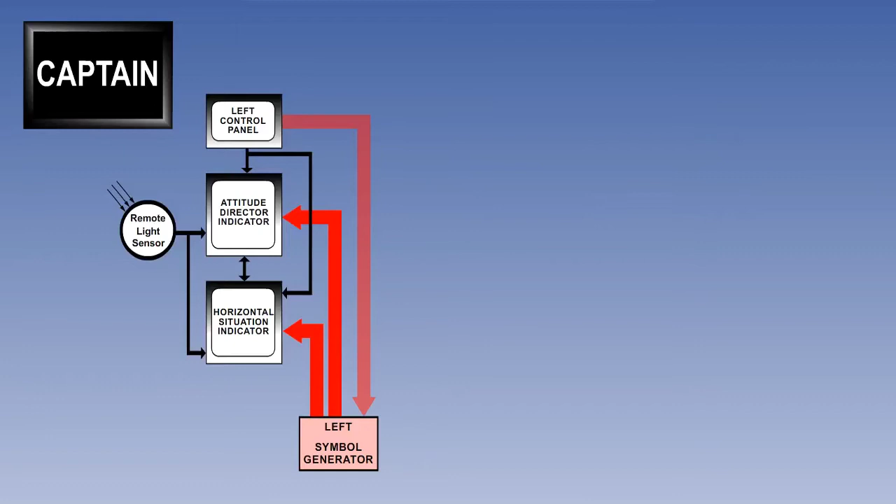A complete EFIS installation is made up of two individual systems, one for the captain and one for the first officer. In the diagrammatic layout here, we can see that each system contains an EADI, which is the preferred Boeing term.

Airbus call it a Primary Flight Display, or PFD. There is also an EHSI, as Boeing call it. Airbus call it a Navigation Display, or ND. However, you should be prepared to see EADI and PFD used interchangeably, and the same with EHSI and ND. Also, other manufacturers may use either term.

Additionally, there is a control panel, a symbol generator, and a remote light sensor unit, which responds to ambient light conditions on the flight deck to automatically adjust the brightness of the screen display. In addition, a third backup symbol generator is incorporated, in case a system symbol generator should fail.

In this lesson, we are going to look only at the Electronic Attitude Director, or EADI part of the EFIS system.

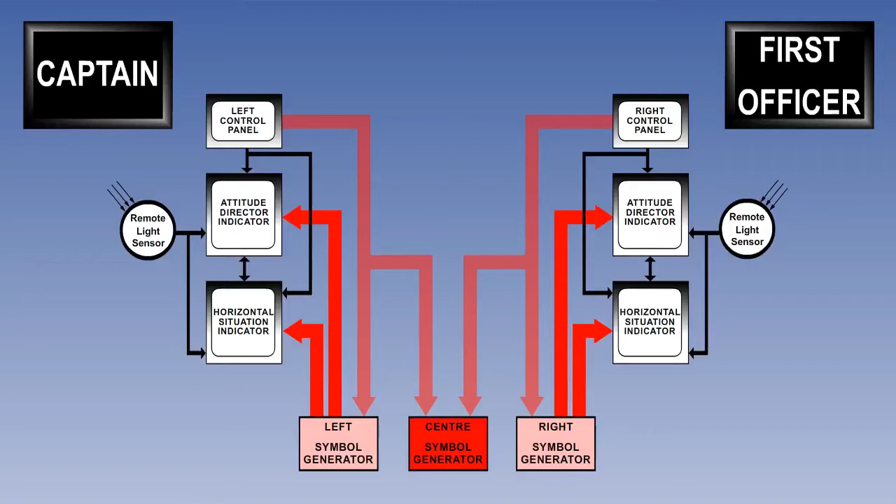The EADI is an electronic representation of an Attitude Director Indicator. Here is the traditional gull-wing motif of the Attitude Indicator in a slightly modified form, overlaid on the horizon background. The EADI therefore displays normal pitch and roll attitude indications.

However, Flight Director command bars can also be superimposed. These can be represented in two basic forms, either the V-wedge type or the crossbar type. Command bars are looked at in more detail in the lessons on automatic flight and control systems. At this stage, note that the example EADI shown here incorporates electronically generated cross command bars, the aim being to keep the crossbars centered on the aircraft symbol.

Localizer and glide slope deviation indicators are also incorporated. Other key information can also be shown, and we will work our way around the EADI display in a clockwise direction. So, starting at the lower left-hand corner, we can see

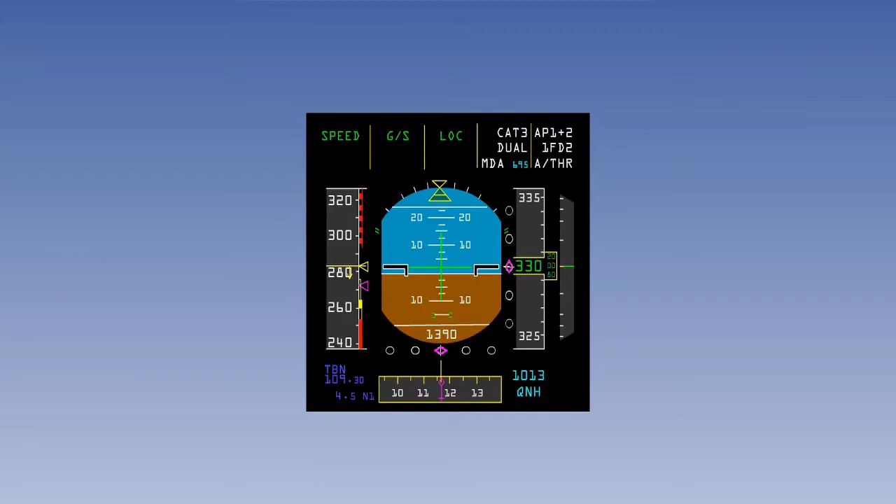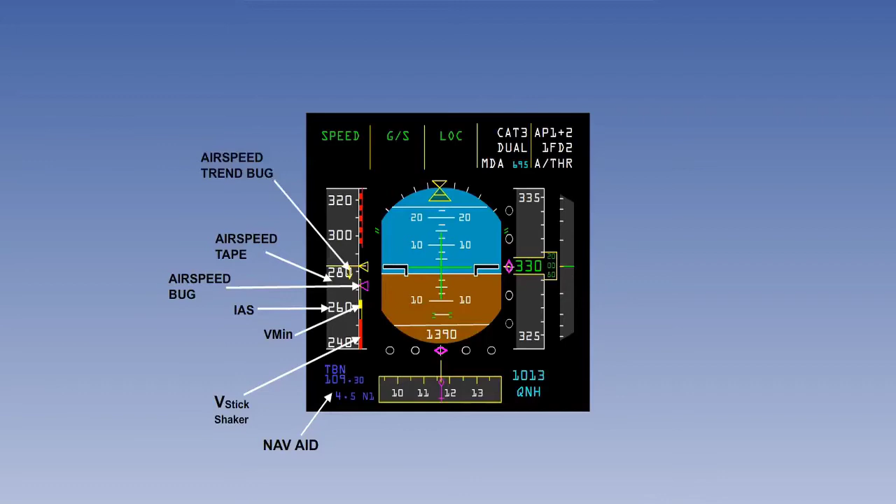the active navigation aid in use, and an airspeed tape which shows indicated airspeed or calibrated airspeed from the air data computer. Critical speeds and an airspeed trend are overlaid on the airspeed tape. The airspeed trend pointer indicates the direction of the difference between actual speed and commanded speed on the speed error scale.

Moving to the top of the screen display, we can see in green the auto flight mode selected. The speed symbol shows the auto throttle status. This displays whether takeoff and go-around power, which is TOGA for short, maximum takeoff power, climb power or thrust speed modes have been selected.

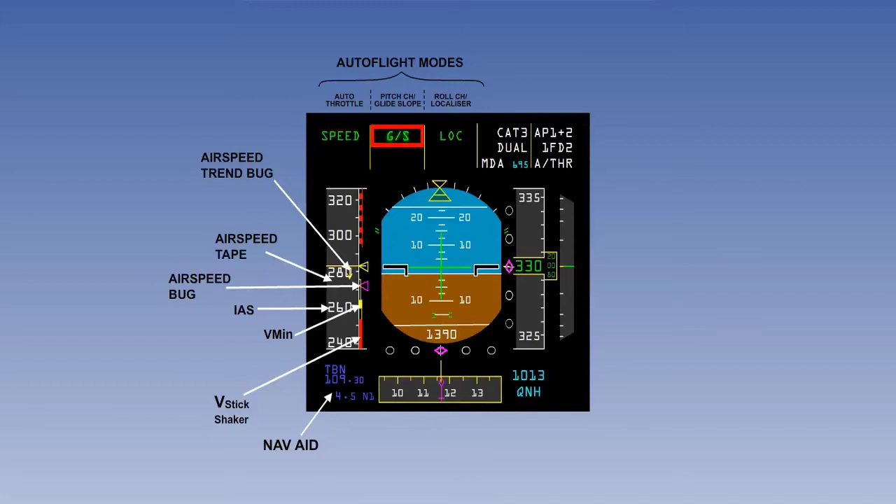The next column shows the pitch mode selected for vertical nav or glide slope. And the third, the heading, nav or localizer mode engaged. The autopilot status is shown to the right. In the example shown here, we can see that autopilots 1 and 2 are engaged, along with the autothrottle.

On the right-hand side of the display, we can see that there is an altimeter tape and a vertical speed indicator. At the base of the display, we can see there is a heading tape and a heading bug.

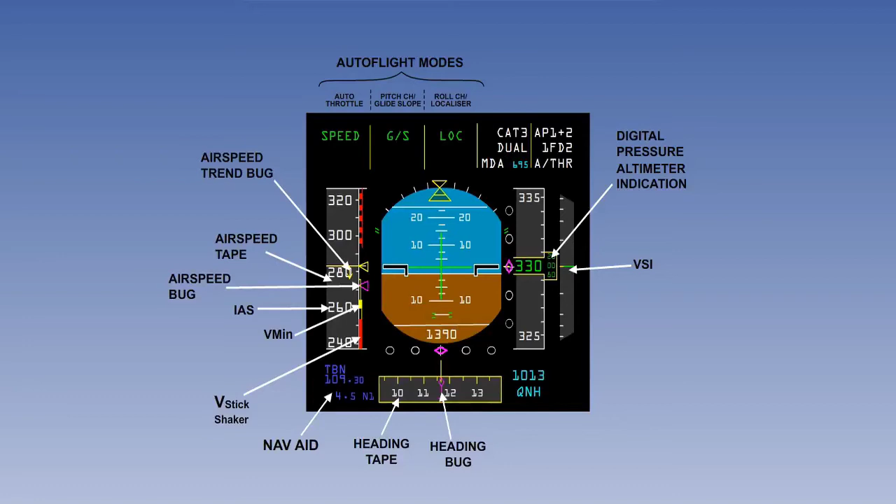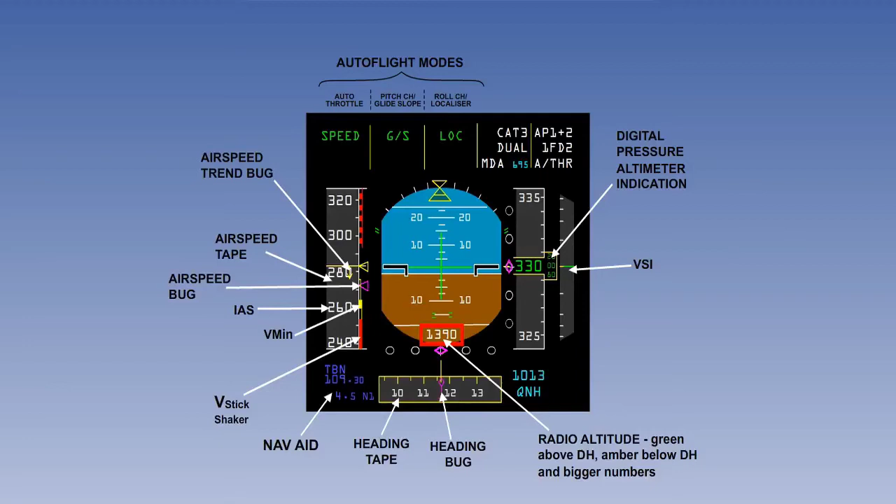In this particular display, which is representative of the primary flight display on an Airbus A320, radio altitude is incorporated in the location shown here. Note, however, that the layout of screen displays can vary slightly between manufacturers, although the information displayed will be essentially the same. Often the radio altitude display, which also incorporates a decision height alert, is located at the bottom right of the screen.

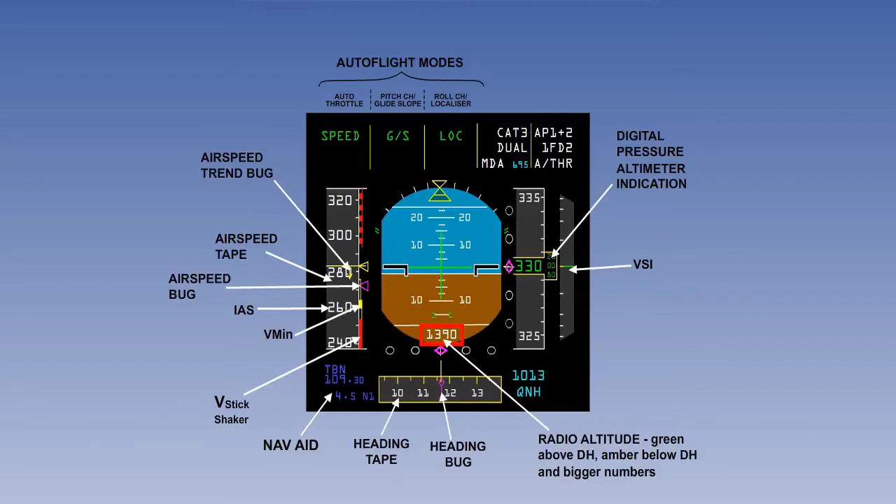The equivalent Boeing system is similar, but a lot less cluttered. There is no need to learn the detail of these displays. The idea is simply to show you the type of information displayed. As we said earlier, details will vary from system to system.

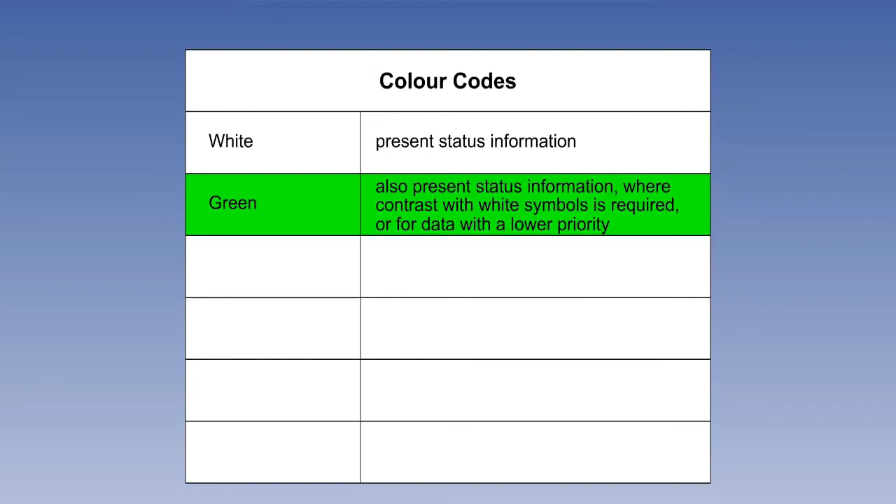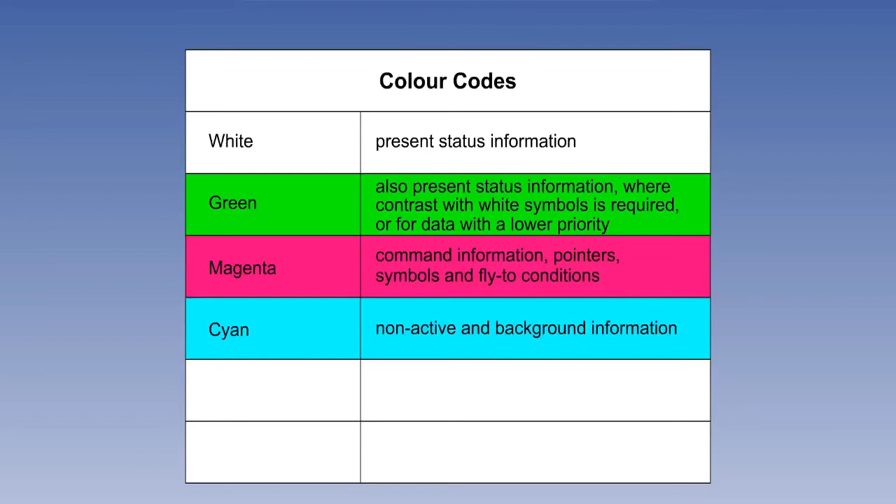Let's look now at the colours generally used in EFIS. White denotes present status information. Green is also used for present status information, where contrast with white symbols is required, or for data with a lower priority than white. Magenta is used for command information, pointers, symbols, and fly-to conditions. Cyan is used for non-active and background information. Red denotes warning information. And amber is used for cautionary information, faults and flags.

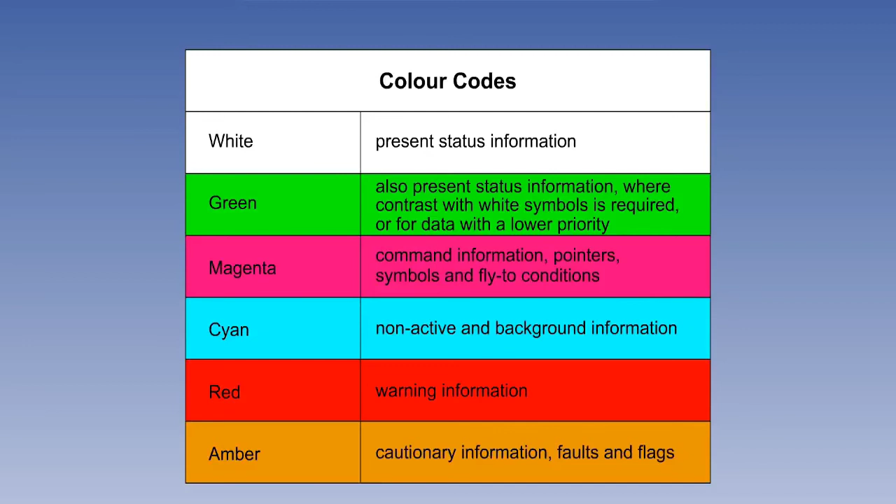Radio altitude is displayed on the screen below 2,500 feet. As mentioned earlier, it may be presented in differing formats. A common format is illustrated here. Between 2,500 feet and 1,000 feet above ground level, the radio altitude is digitally displayed. Below 1,000 feet, the digital readout continues, but the display changes to incorporate a circular white arc, which is graduated in 100-foot increments. The length of the arc reduces in an anti-clockwise direction as height above ground level reduces.

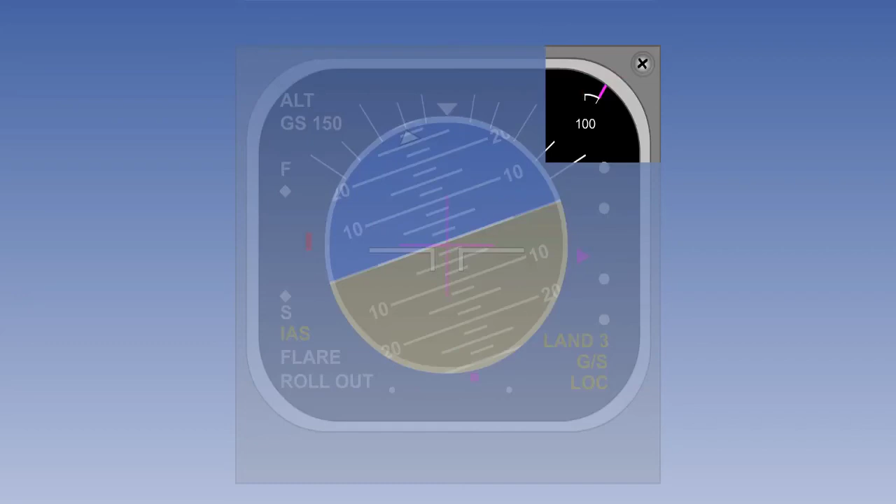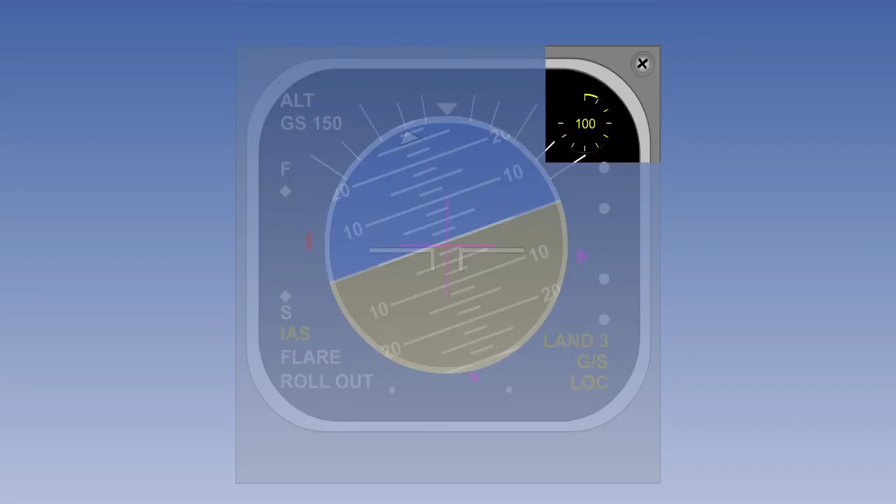The selected decision height is displayed by a magenta-coloured marker on the circular white arc. At decision height plus 100 feet, an aural alert chime sounds. At decision height, the magenta marker and white arc will flash and change to yellow, and the alert tone ceases. Pressing the DH RST button will cancel the alert chime and the marker flashing, and will also change the decision height displays back to their normal colour.

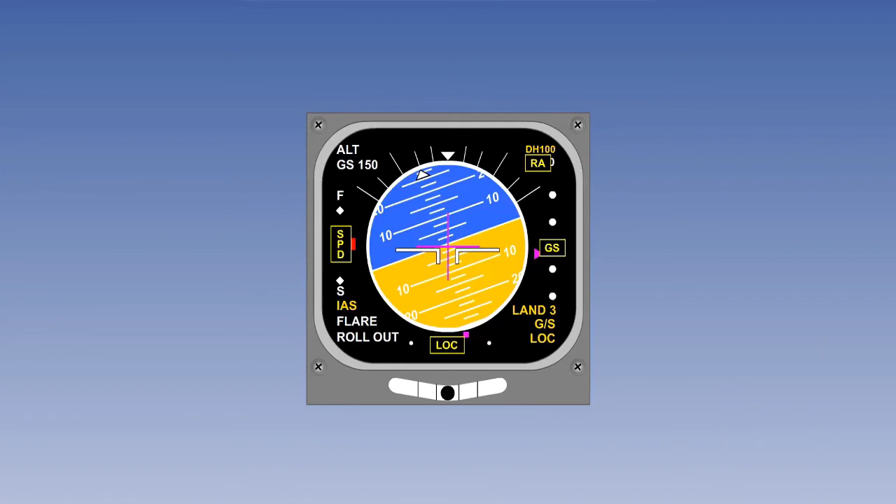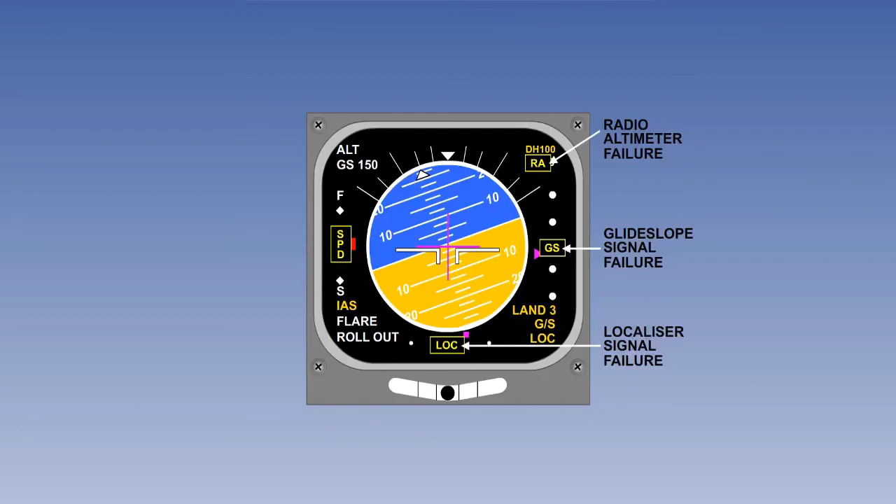Finally, let's look at EADI failure annunciations. Should a signal from a data source fail, the failed data source will be highlighted or flagged in yellow. Here we can see failure annunciations of the radio altimeter, the glide slope signal, the localizer, and the speed computer.

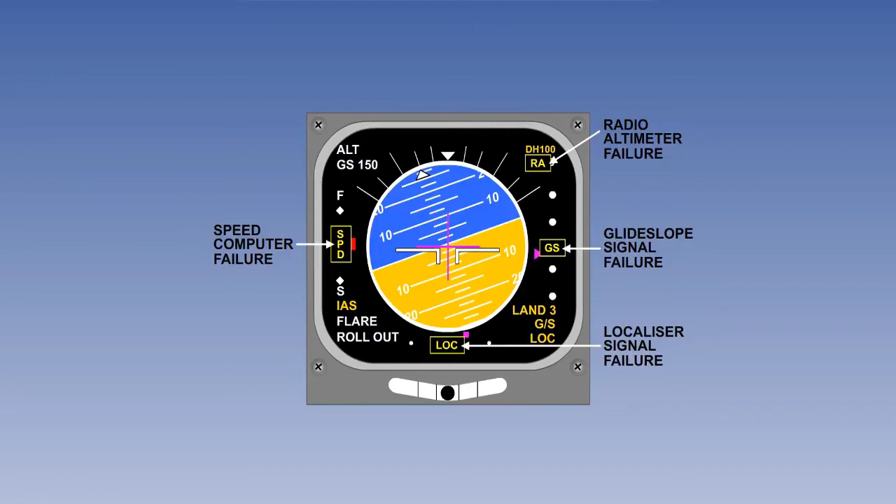A complete EFIS installation is made up of two individual systems. Each system comprises an electronic attitude director indicator, or EADI, an electronic horizontal situation indicator, or EHSI, a control panel, a symbol generator, and a remote light sensor unit. There is also a third backup symbol generator.

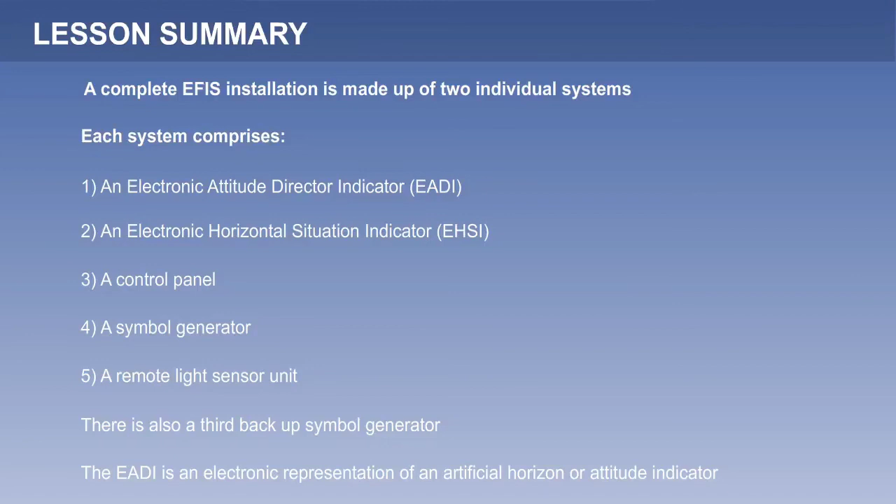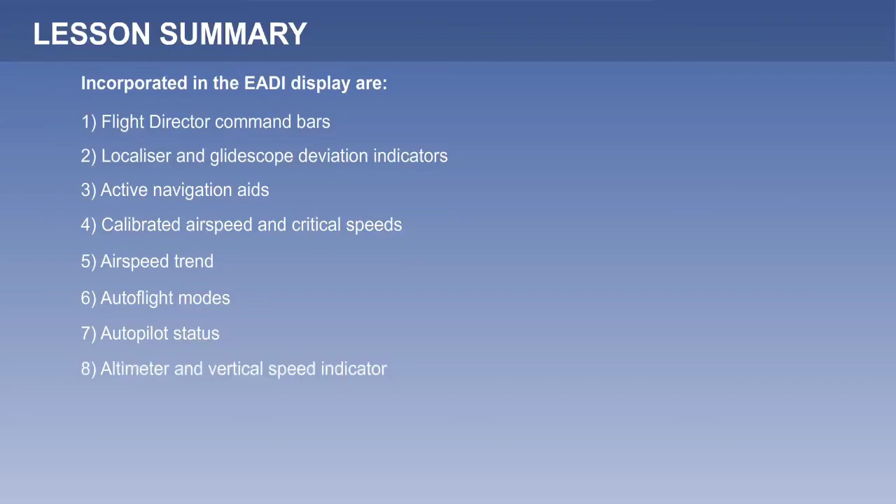The EADI is an electronic representation of an artificial horizon or attitude indicator. There is a color coding convention. Incorporated in the EADI display are flight director command bars, localizer and glide slope deviation indicators, active navigation aids, calibrated airspeed and critical speeds, airspeed trend, autoflight modes, autopilot status, altimeter and vertical speed indicator, aircraft heading, and radio altitude.

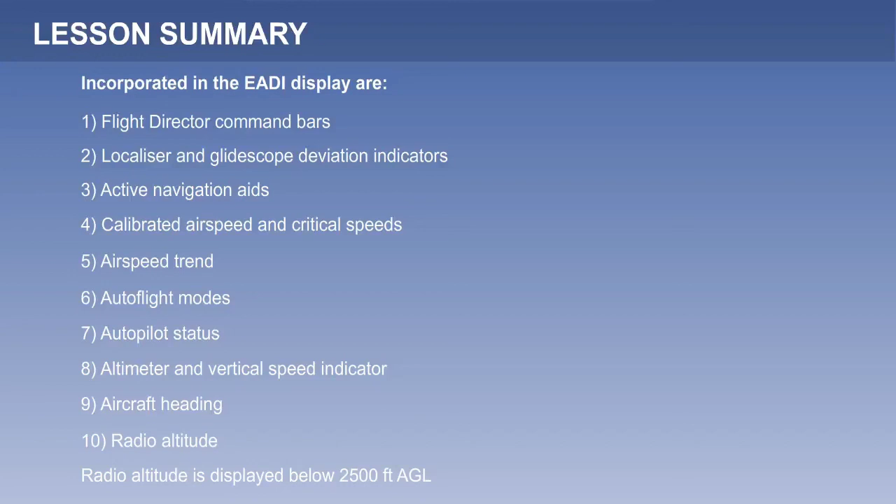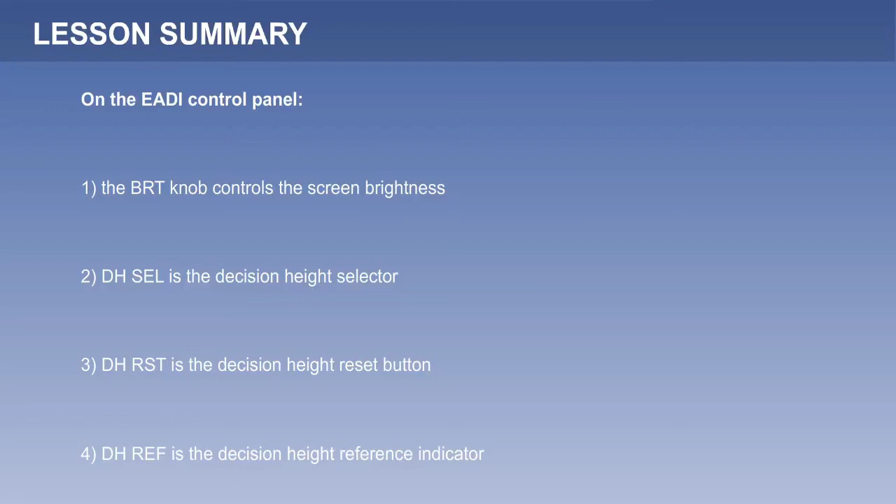Radio altitude is displayed below 2,500 feet above ground level. On the EADI control panel, the BRT knob controls the screen brightness. DH SEL is the decision height selector. DH RST is the decision height reset button. DH REF is the decision height reference indicator. In the event of an input failure, there is a warning flag display system.